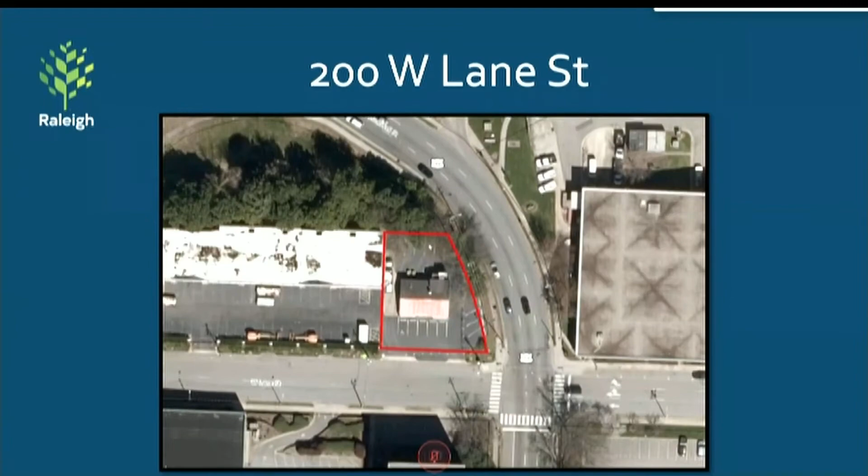As stated previously, the property is zoned DX12 UG. This slide shows the existing conditions and structure. This slide details the proposal.

The majority of the relief sought is related to the streetscape standards for North McDowell Street and West Lane Street. There is a desire to retain the existing conditions along North McDowell Street, with minor reductions to the planting area widths, sidewalk widths, and the number of street trees required. On West Lane Street, there are reductions being requested to the sidewalk and planting area widths, and also the number of street trees that would otherwise be required.

There is also relief being sought in the form of a variance and design alternate for the existing driveway. The driveway does not comply with city standards for spacing between the driveway and the adjacent intersection at North McDowell and West Lane Street, and also does not comply with the minimum driveway spacing requirements between it and the property to the west.

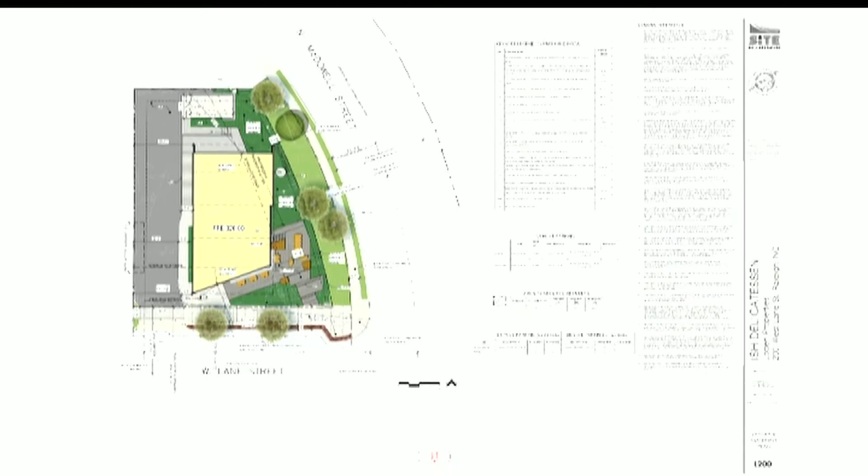The last portion of the variance being sought is a building height standard contained in section 3.3.2. This code section requires properties with a 12-story height designation to be a minimum of 2 stories. The applicant is requesting to construct just a 1-story structure. Here is an elevation provided in the application materials to show what that will look like.

Staff, both zoning staff, planning staff, and transportation staff, do not have any immediate comments on the design alternate or design adjustment request. As it relates to the variance request, staff has only one comment on the height standard to provide a minimum of 2 stories, because this property is zoned for 12 stories and has an urban frontage.

Staff's comment is that there was no obvious reason provided in the application about a peculiar condition of the property that would prevent a 2-story structure. As we understand it, it is more in keeping with the desired use that they adhered to a 1-story structure instead of the required 2. So that is staff's only comment.

I know transportation staff are available if there are any specific questions related to the transportation details. And I'm happy to answer any other questions if there are any from the board.

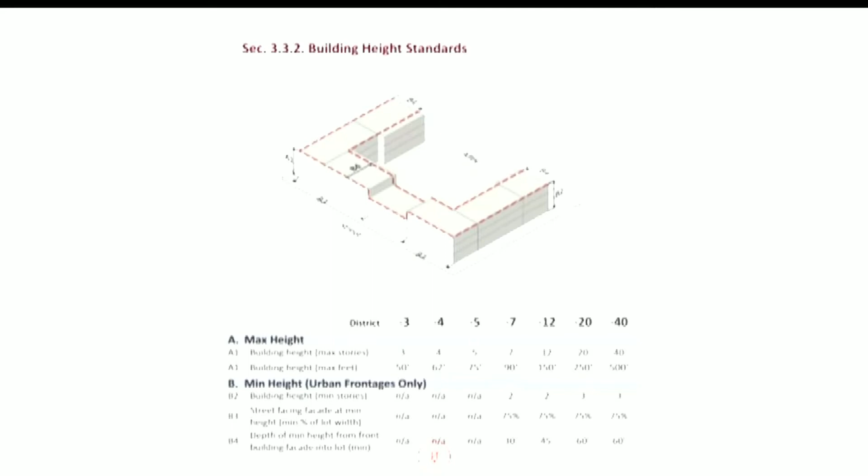And Michael, do you have Brandy on the phone? I think I saw that she came in. Hey, hi there. I'm not sure, I'll defer to John to see if she's now joined. She is actually, do you want me to unmute her to start the process to bring her in? That'd be great, okay.

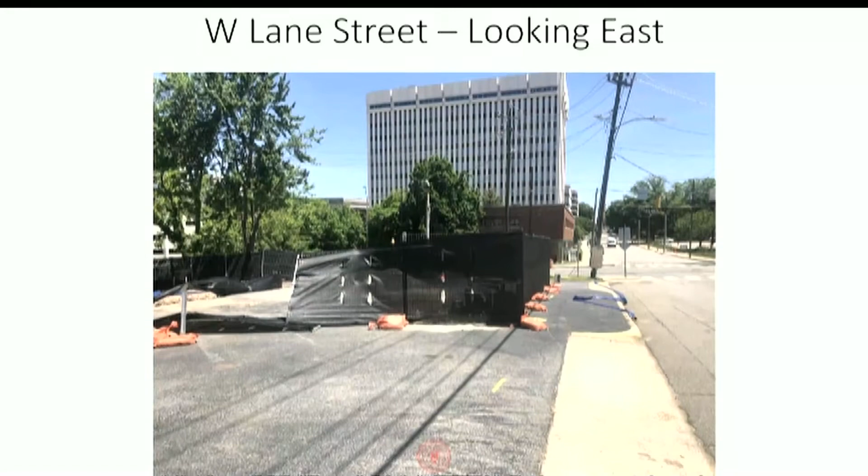Next picture. So this is a picture looking into the site from West Lane Street. You can see the hotel there on the left-hand side of the picture, and the site itself there on the right-hand side. I'll note that that hotel building wall right there is about 22 feet tall, just to give you a sense as I talk about it in relationship to the proposed building and the spirit, purpose, and intent with what we're doing from a height standpoint.

All right, next slide, please. So this is the site plan. You'll notice because we're in the DX district, all of our outdoor amenity area has to be at the ground level outside. That's what you see between the building and the corner of the property, activating that corner, creating a really unique space as folks are driving by out of downtown.

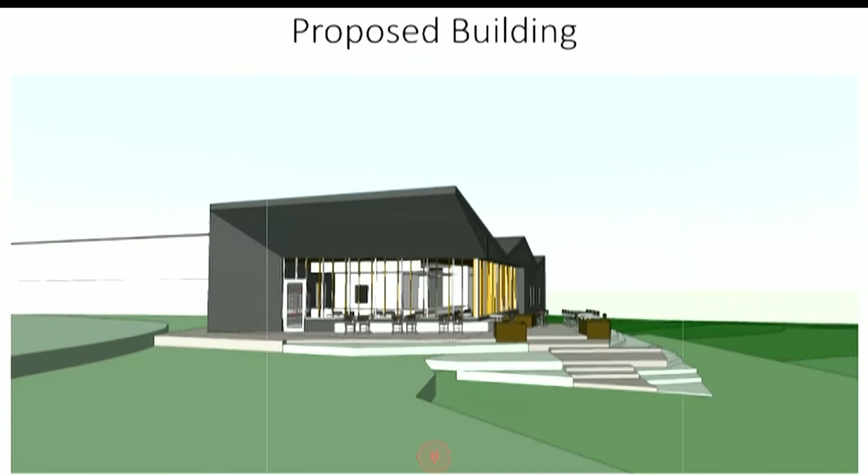Next slide. So this is the proposed building near the intersection of West Lane and McDowell looking north. Again, you can see what a unique building Clearscapes has designed with all that transparency at the corner and that kind of activity spilling out towards the corner, creating a really unique visual there. You'll notice that architectural feature that ramps up from the front of the building. If you can go to the next slide there.

So while we're on this slide, I noted this in relationship to our variance request related to 1-story versus the requirement for a 2-story building. As I mentioned, the existing hotel right next door, the wall closest to the site, is 22 feet in height. The building here is approximately 20 feet, and relative to average grade is taller than that - I believe just 23.5 feet from existing grade.

So actually, given the finished floor elevation of the proposed deli building, that architectural feature will be just about a foot taller than the roof of the hotel. So in terms of the spirit, purpose, and intent of creating that consistent urban street wall from a height standpoint, we think we're achieving that through that portion of the building, the architectural feature that will actually be taller than the hotel closest to the deli building.

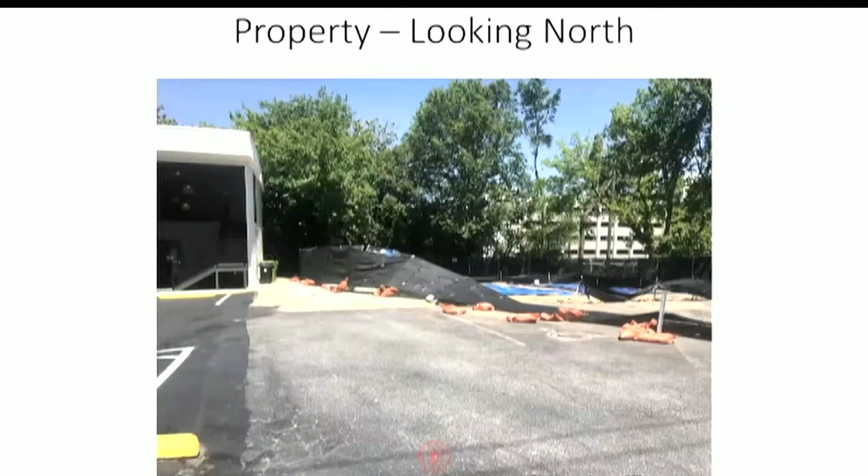Okay, no worries. While that's going on, I'll just say we are retaining - there are 2 driveways on the site today. We are closing the one that is closest to the intersection, and I believe narrowing up a little bit the driveway to the west, but maintaining that existing westernmost driveway. That will be the property's access point.

It's located as far away from the intersection as possible. So complying with that distance would be a hardship in that it would lose any access point directly to West Lane Street. We don't have any access to McDowell Street. And again, that doesn't result from action of the owner - those are existing conditions.

And from a spirit, purpose, and intent standpoint, we're setting that as far away as possible from the intersection. Going next to the 8.4 and 8.5 design adjustments.

Keegan did a good job of summarizing the requests related to McDowell Street. Again, the requests in front of you now are the result of working with transportation over the last few months, coming up with something they could support as well.

So for McDowell, we are really looking to maintain the existing streetscape. We are adding some new street trees along that area, but because of power lines and such, they have to be clustered, not a uniform 40-foot on center.

And for West Lane Street, again, we are providing something close and comparable to what the downtown master plan and the required streetscape would be, with just a 2-foot reduction in the sidewalk width, a 2-foot reduction in the planting area, and because of some underground utilities having to cluster those trees together.

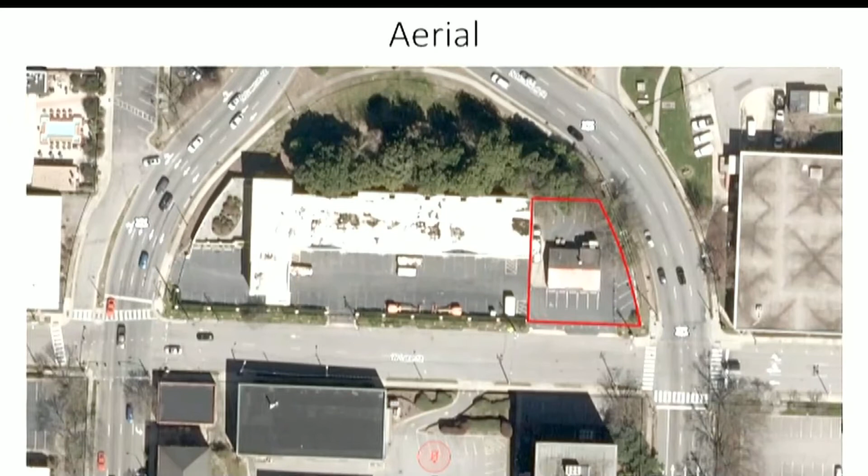So Catherine, I don't have everybody unmuted, so if you want me to unmute people specifically. I would unmute all the participants. And I think, again, Michael has confirmed that the participants were all with him for this case. So I think I would also ask if staff has any additional questions as well, or anything else they would like to add. So that would be Keegan.

Staff — Kathy has asked her question. So Kathy's question is for Keegan: what's the rationale for the 2-story requirement?

Yeah, absolutely. There's not really much provided verbatim in the code. Typically, each code section does contain a purpose and intent statement. Our understanding of the minimum 2-story requirement is related to creating a street wall, like Michael touched upon. Essentially, a large swath of downtown is zoned for fairly tall buildings, and there is a desire for all of those parcels to be developed fully to the maximum height allowance. I think the intention in these districts with rather tall height allowances is a minimum is put in place to create some uniformity so you don't have buildings towering over smaller structures, and to promote a greater degree of density and height in these downtown areas or other places with a large height allowance.

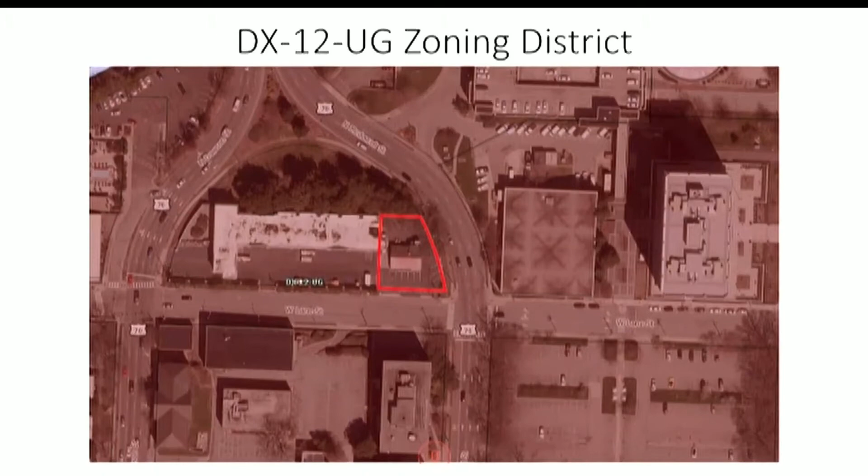Okay, so Mr. Birch, I assume there'll be no rebuttal since there was nothing raised in the way of an issue. Staff, anything further you want to add to this?

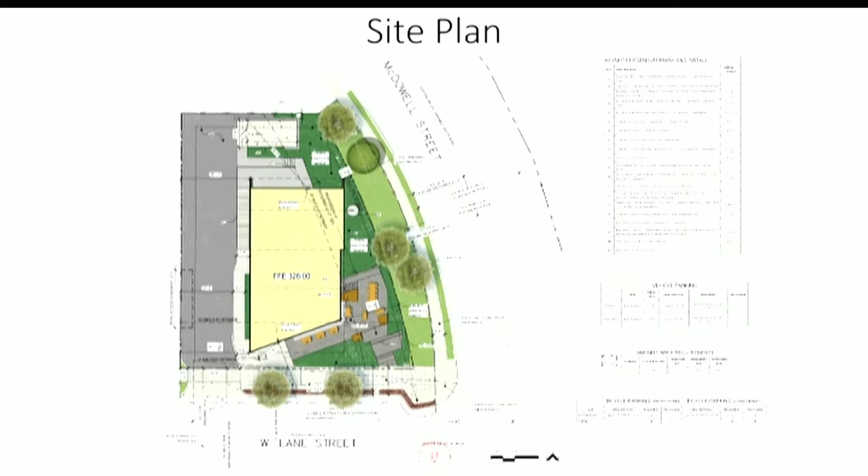Yeah, thank you. I was going to raise the question about the alternate when we got to the vote, because I understand everyone can deliberate, but thank you for reminding me nonetheless. So for this first item, Mr. Kenny, would you be the voting member on this first item, the variance, please? And again, we're open for deliberation, but I will also accept a motion.

John Koontz, motion to approve. I second the motion. Who was the second, please? Steve Kenny. Okay, thank you, Mr. Kenny. So we have a motion and a second. Any further discussion? Mr. Puccini, would you then call the roll?

All right, Mr. Kenny. Approve. Mr. Koontz. Approve. Mr. Swink, Chairman Swink. Approve. Let's see. Mr. Mile. Approve. Thank you. And Ms. Redisell. Approve. Thank you.

Thank you, folks. Let's move to the second item, which is the design adjustment for 200 West Lane Street. Again, we'll have any board deliberation, or I'll entertain a motion. I make a motion to approve. Thank you, Mr. Mile.

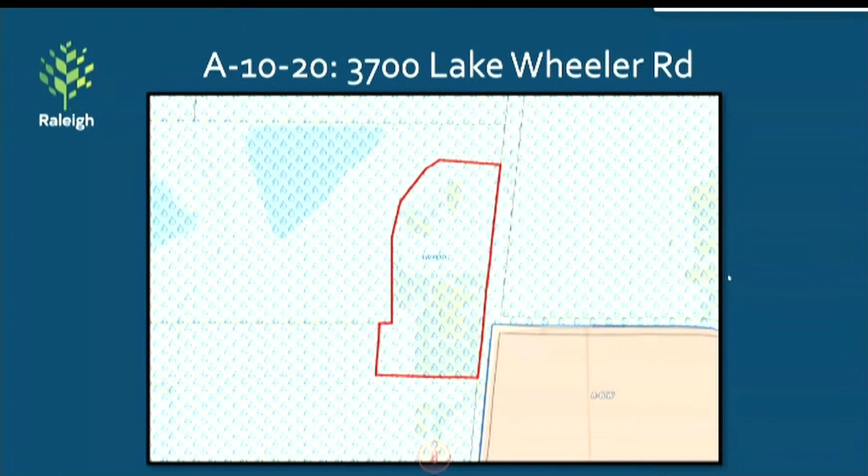As you can see, the subject property is a rural parcel. Currently situated on the property are a church, some accessory structures, and a residence, and they are all on one lot of record.

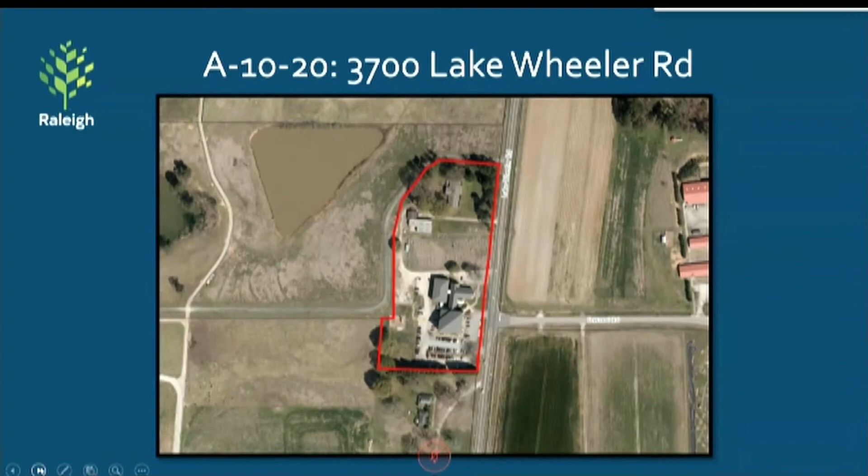That is basically the summary of their requests. I'll note that transportation staff has reviewed the request to make sure it is complete and accurate, and that they are requesting the exact relief needed. It's my understanding they don't have any comment on the application, and neither do zoning staff, but they are here to answer any questions you may have. That concludes my presentation.

Thank you, Mr. McDonald. Any questions for Mr. McDonald? No? Let's move on to the applicant, please.

I would start, Mr. Chair, by recognizing Nicholas Carr as the point person, the attorney for the case. Please state the name of any witnesses before you and introduce them before they speak.

Thank you. My name is Nicholas Carr. I am the attorney for the Point Church of the Triangle. I am also an elder at the Point Church of the Triangle. They've asked me to represent them in this case.

This property has been before the board before. In the past, we asked for a variance that was granted a couple years ago as well. Just a brief history of this parcel: the church and the cemetery especially date back to the Civil War times. There are several Civil War descendants and soldiers actually buried in that cemetery.

When the Point Church of the Triangle began operating the site, we noticed some deterioration of the cemetery, specifically that fixture. You may notice it's right in the middle of the plot, just south of our proposed subdivide line. It's that rectangular shape that's there. We erected a fence to protect some of the gravestones, because there were people actually parking almost right up onto the gravestones themselves.

Thank you. Okay, so we have a motion from Mr. Koontz. Do we have a second? Second, I'll second. Who was the first? When you second, please state it. I heard Mr. Mile first. Thank you, Mr. Mile, for your second. Any further discussion?

If not, we will take a roll call. Mr. Koontz? Okay, we gotta hear you, you're on mute, he's muted. My mouse went on hiatus. Approve. Thank you. Mr. Mile? Yes. Thank you. Chairman Swink? Approve. Thank you. Ms. Rittisell? Approve. Thank you, Mr. Rainey? Approve. Thank you. Okay, thank you very much.

Thank you, Mr. Carr, for being with us today. On to case hearing number 3.

Thank you. The third case is 3402 Leonard Street. The property owners are Alexander and Morgan Butts. The variance request or case is BOA-0009-2020. And we have two people signed up to participate in this case, Cecile Richardson and Alex Butts.

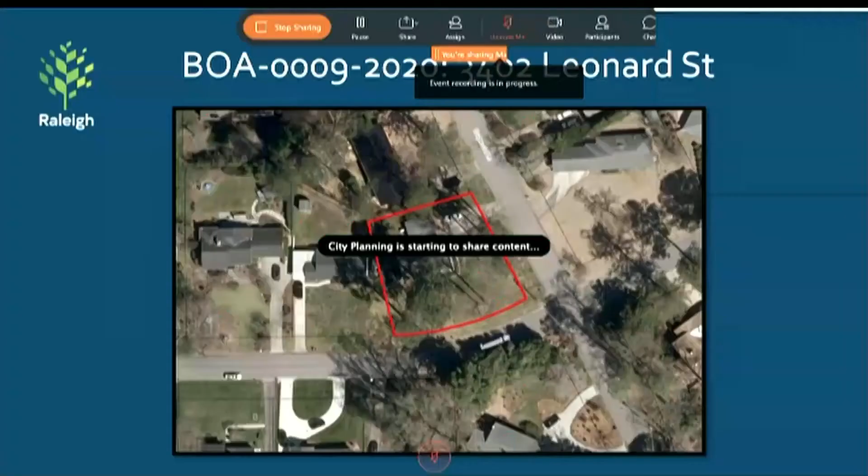Now I'll begin the presentation. Here is the subject property. It's located on the corner of Dogwood Lane and Leonard Street. The property is zoned R4.

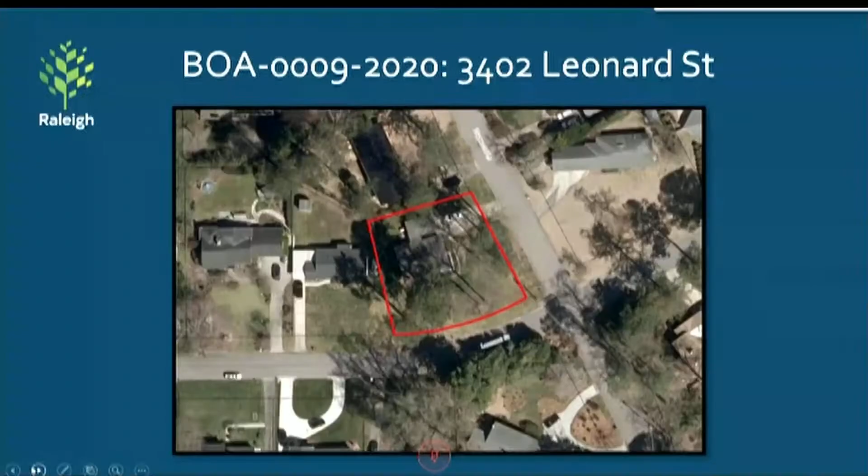As you can see in the next slide a little more clearly, there is a sliver that exists outside of the existing setback. So to fill in the structure between the primary residence and this existing enclosed garage will require filling in a fairly narrow strip, estimated to be about 6 inches, but advertised in the request as 1 foot, just to provide some wiggle room to the applicant. Filling in this portion of the residence does require a variance because this small sliver is situated outside the required setback. Thus the addition will be about 6 inches to 1 foot further into the setback than required.

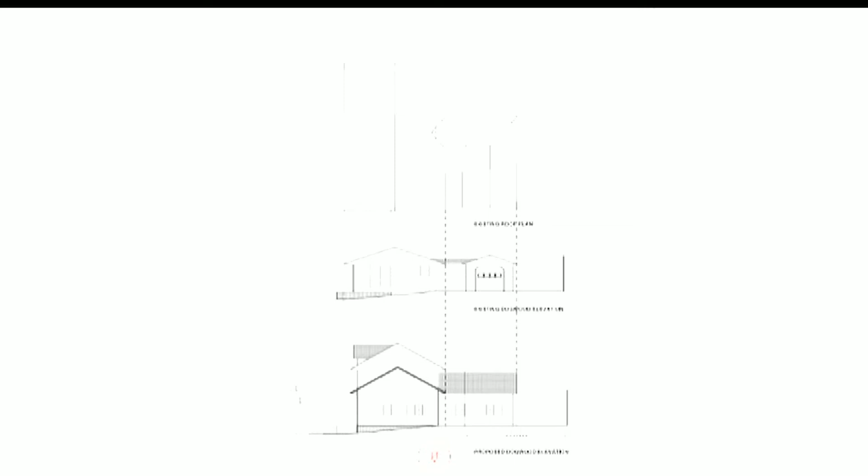That's probably better shown by this image. The central or middle image shows the existing Leonard elevation. The bottom image shows the proposed elevation. Again, there'll be a substantial addition, both vertically and laterally.

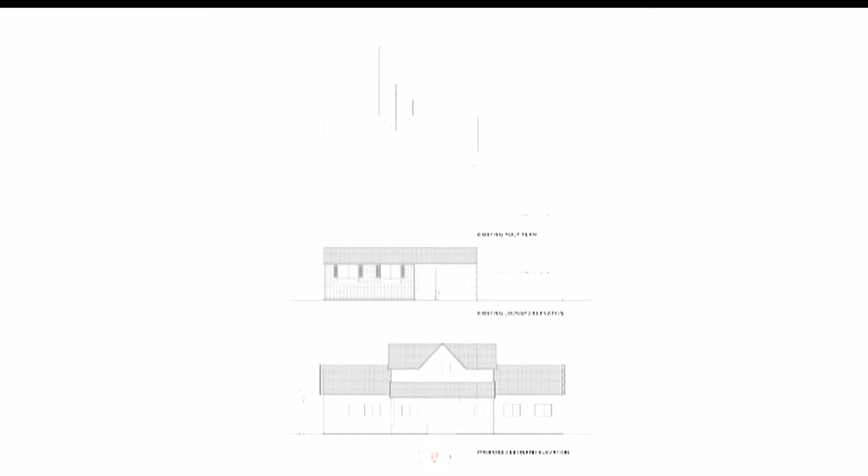I wanted to provide some commentary that staff had related to the variance standards. For the first standard, that unnecessary hardship would result from strict application of the ordinance, we wanted to note that the applicant is also proposing to add a second level and an addition towards Dogwood Lane. This image shows how that addition will branch out towards Dogwood Lane, in keeping with or within the allowed setback. There is substantial buildable area on the site within the allowed setback. We understand there is an existing structure there, and it may be more conducive to their plans to fill in the site, but staff wanted to make the comment that there already is a proposal to add in that direction, and there's other buildable area on the site that wouldn't necessitate granting a variance, despite how small that margin is.

Standard number 2: the hardship results from conditions that are peculiar to the property, such as location, size, or topography. Staff has no comment.

On hardship standard number 3, that the hardship does not result from actions taken by the applicant or the property owner: staff's comment is that the existing breezeway and garage are legal non-conforming structures that can remain in place. Again, additions elsewhere on the property would not necessitate altering these in any way.

The 4th standard is that the requested variance is consistent with the spirit, purpose, and intent of the ordinance. Setback regulations are intended to provide adequate and uniform spacing between structures, both on the property and between adjacent properties. While the expansion will not substantially increase the amount of conditioned space within the required setback, it will result in the garage being converted to a more livable space, and thus could be viewed as an intensification of the use. So that concludes our commentary.

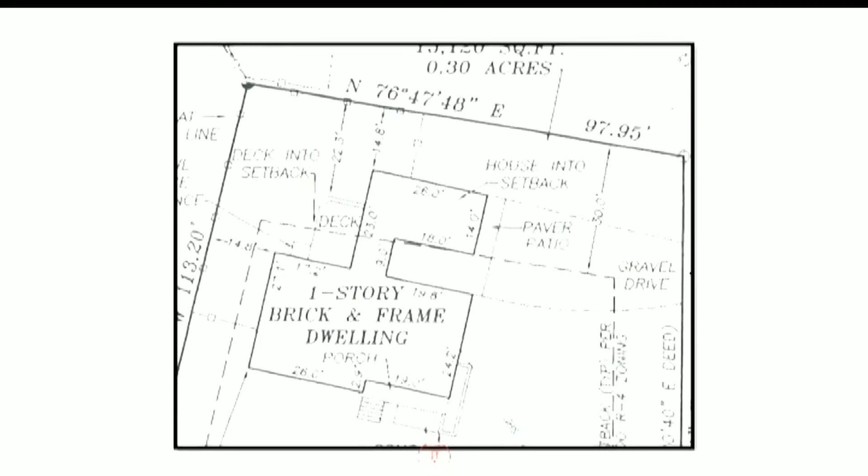Other questions? No? Okay, let us hear from Ms. Richardson, the applicant's representative. Yes, again, this disembodied voice is Celie Richardson.

The request, as Keegan said, is for about a 6-inch wide strip that tapers, and the 1 foot would be useful, with the purpose to fill in the interior breezeway.

The project can be done in addition to the house while leaving the breezeway, but it's an awkward space. It's not wide enough to even put a couple of lawn chairs or a grill very easily, and so the Butts wish to fill that in as part of their project.

Next slide, please. Next slide, Keegan. Yeah, some of this has already been gone over, but this house was acquired by Mr. and Mrs. Butts in May of last year.

Next slide, please. As Keegan said, any expansion would be in full compliance with the UDO, except for this slight encroachment. I do note that the Butts are looking toward a one-story addition, rather than a two-story addition at this point. They bought the house with the idea that they would add on to it. Mrs. Butts is pregnant, expecting a baby this fall. They bought this house in this neighborhood because this is home to them. They have family nearby. They wanted to raise their children in this kind of neighborhood near their family, and they thought that this would be in compliance.

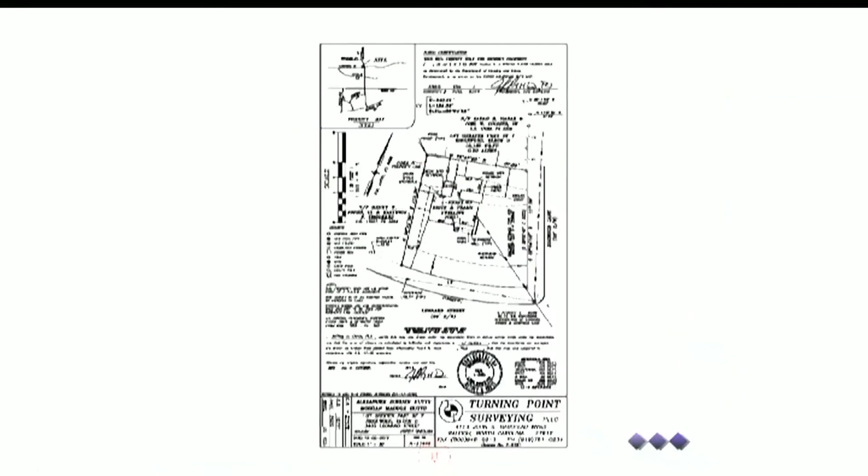Thank you again, this is Celie Richardson. Next slide, please, Keegan. This is, just for the board's information, the previous approval that was provided to us by Mr. Hodge and Mr. McDonald when we had our meeting, just for FYI.

Again, the 1-story and 2-story, just to summarize quickly, are both in compliance with the UDO. We were not able to proceed on this because our contractors need information on how they can build and whether the variance will be granted before giving quotes.

Can you hear me? Yes, go ahead, Alex.

When my wife and I first got started on ideas for this project, we were unsure if we would be going up with the addition and turning it into a 2nd story, or going out to the side with the addition. Once we discovered the issue with the rear setback, discussions with contractors became difficult because they needed more clarification from us and the city before providing accurate estimates. When we submitted this variance request in January or early February, we met with city planners and found it best to submit plans showing both options.

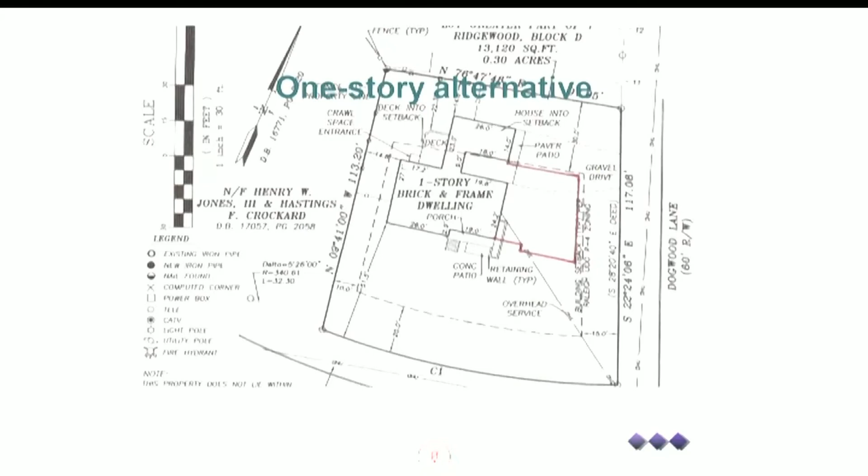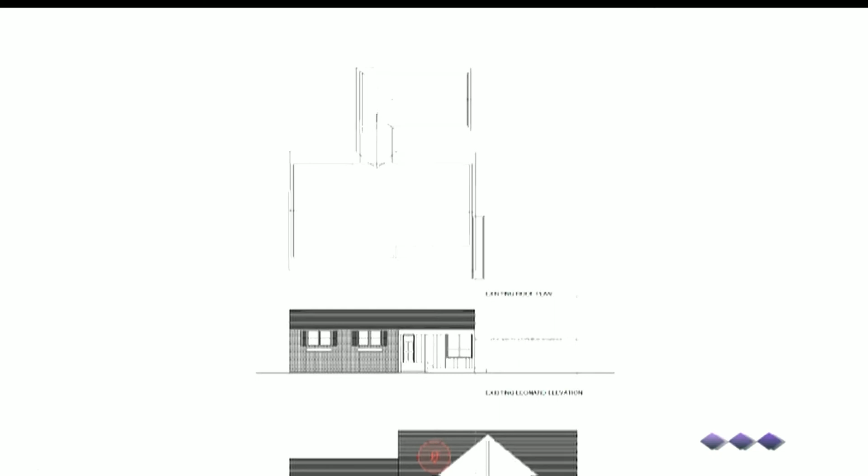This slide again shows the existing footprint of the house and what the potential view post-project would be. This view is looking from Leonard Street.

Now I would like to walk you through the two-story alternative that we had submitted originally. However, since that time, our focus and preference has shifted to the one-story addition. This is the view of the two-story alternative, as well as the addition towards Dogwood—the worst-case scenario showing both going up and out. This particular view is from the front, from Leonard Street, looking toward the property.

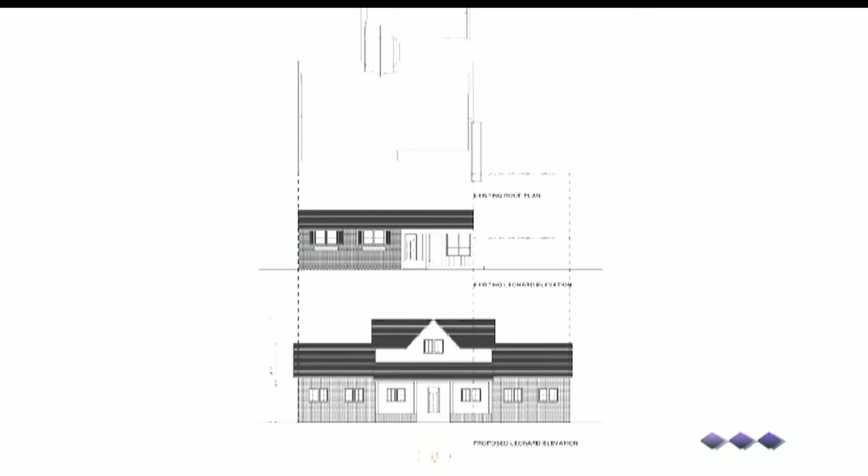At this point, I would like to turn things back over to my attorney. Thank you very much, and this is Seeley Richardson again.

We will summarize briefly to respond to the ordinance factors. We believe that denial would cause an unnecessary hardship. The breezeway is too small. If it's denied, he can still do the addition, but it will be left with an awkward and unusable space, which would be difficult to build, difficult to adapt into a building.

And the breezeway is peculiar—not only peculiar to the property, but peculiar to this house and not the property itself. So even more, it's not in compliance with the standard.

And again, this was not created by the owners, and they stopped immediately when they discovered the issue to come before this board to get approval.

And it's consistent with the UDO. Public safety is not implicated. The view from adjacent yards will not be changed. There's no change in use at all—the garage will be left as a garage, there are no plans to change anything regarding that. So there wouldn't be any change in density, it would just be a slightly larger house in the overall project. That's totally in compliance with the UDO, totally within the setbacks, except for this 6-inch sliver.

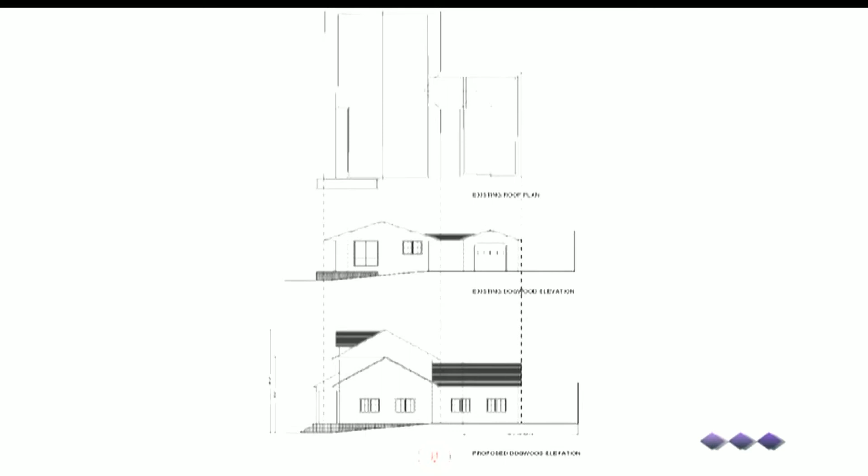So, we've asked for public comment and received none, we can close the evidentiary hearing. Mr. Kenny, you'll now be our alternate for this deliberation, please. And we will take any board discussion or a motion.

I will offer a motion that we approve this application for a variance. Is there a second? John Coons, second. Thank you, Mr. Coons. Any further discussion? Let's take a roll call vote, please.

Sorry, I had to unmute myself. Okay, Chairman Swink, approve. Mr. Coons, approve. Thank you, Mr. Mile, approve. Thank you, Ms. Rittisell, approve. Thank you, and Mr. Kenny, approve. Thank you all.

Thank you, applicant, Mr. Butts and Ms. Richardson. Let's move on to evidentiary hearing number 4. Okay, the fourth evidentiary hearing is 1924 Capital Boulevard.

Bank Central Inc. is the property owner applicant. It's variance case BOA 0006-2020. Three people signed up to participate in this evidentiary hearing: Toby Coleman, Megan Weeks, and Soretta Amos.

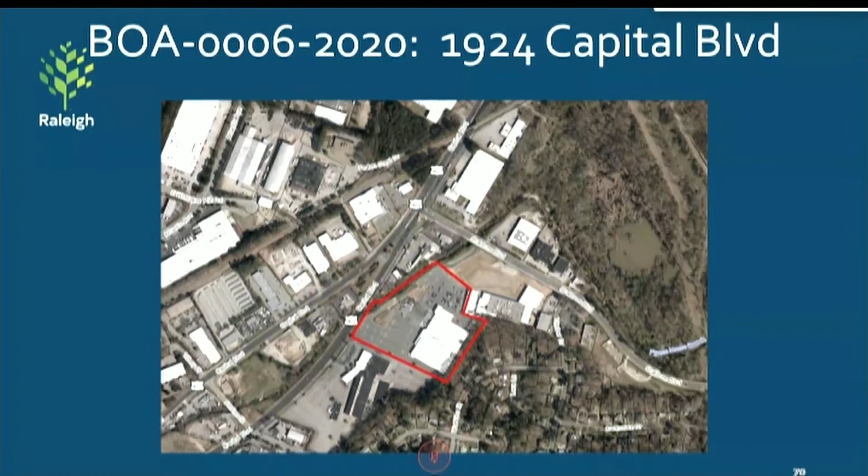Unfortunately, Section 6.1.5.g of the Unified Development Ordinance explicitly states prohibited uses include a sign not explicitly allowed in the zoning district noted in the table of signs allowed by districts from Section 7.3.2, or any signs erected in violation of Article 7.3 Signs. And so this... sorry, there's a hair trigger on this slide presentation.

This is the section we're coming up against, where I would note that the board has made some allowances in the past for this type of variance. Staff is pointing this out again. We have a new board, and we also have a new zoning administrator who I've been in contact with recently on this particular matter.

He believes that these signs, as stated here, are considered a prohibited use. So it's his opinion, I believe, he can speak for himself, he's on the call, but that a variance of this sort would be considered a use variance, which the board does not have the authority to grant.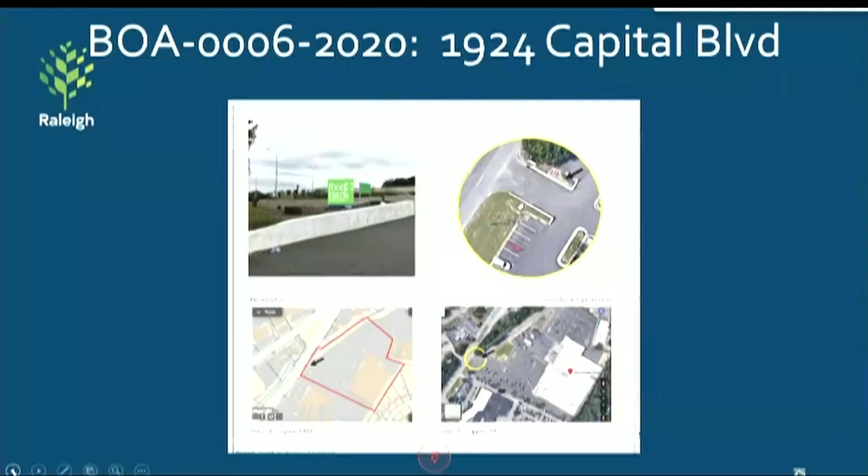Okay, I would note that we did administer the oath to Mr. Rometta, so I'm assuming he is on the call. I don't know if we want to ask him to provide any comment at this time or not. That's up to you—you could hear from the applicant first and then see if you'd like to ask Mr. Rometta a question. The order is up to you on that.

Thank you. Okay, let's hear from the applicant. We'd like to get Mr. Coleman's information before us as well—that might help in some way. Mr. Coleman.

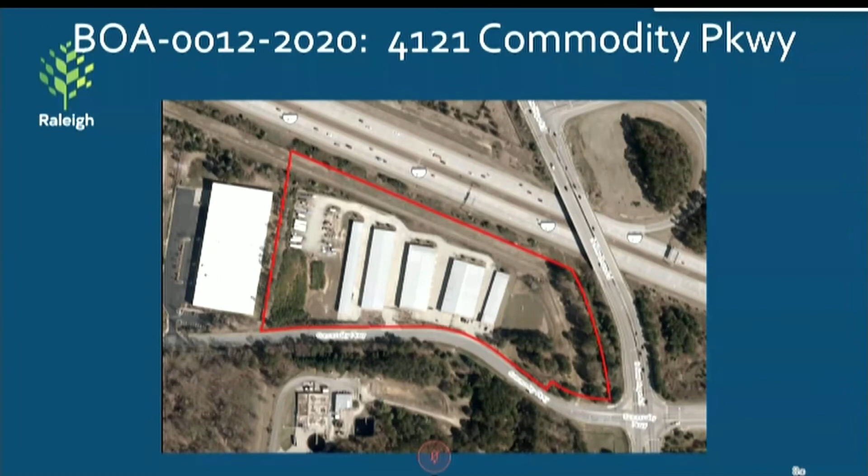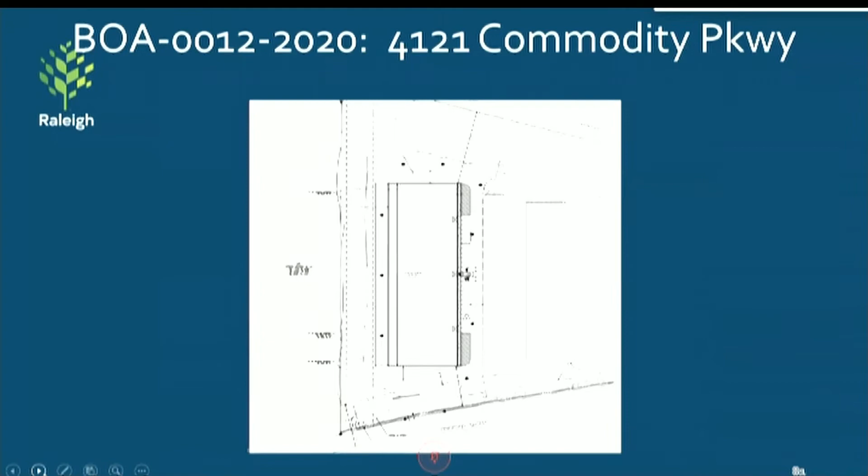This is showing again on the western end of the site where they're looking to add an additional building. This is where all heavy industrial uses have this requirement for a type C1 or C2 protective yard that's to be established along all property lines abutting a public right-of-way.

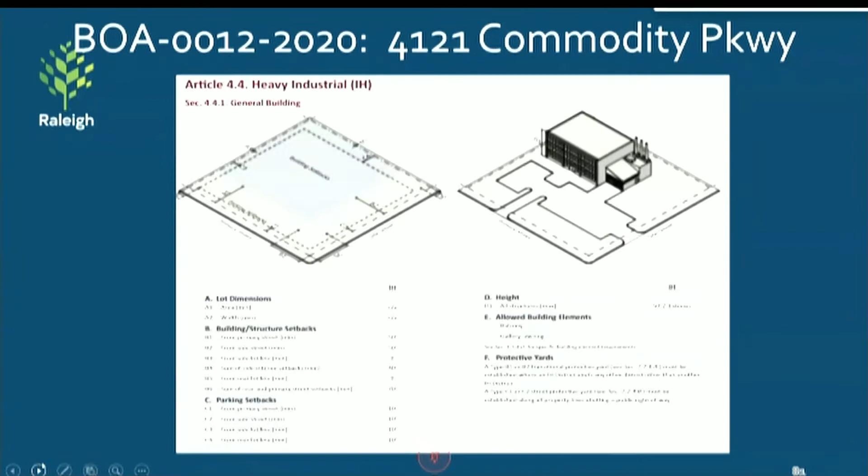And here are the types of protective yards called for in section 7.2.4b. So they would have to do the stuff in the second or third column from the left. So a 10-foot minimum width area with a 6.5-foot tall wall or fence, and then 30 shrubs scattered over the course of every 100 linear feet along those 3 streets.

Or the type C2, which is a wider area. It does not have the solid wall or fence requirement, but it does have 15 shrubs for every 100 linear feet, as well as a requirement that the shrubs be at least 5 feet in height. And they also have a requirement for 4 shade trees, basically one shade tree every 25 linear feet around the edge of the property along those 3 public streets. So those are the provisions they're seeking relief from.

So again, I think the applicant would need to provide additional information as to why a variance would be needed with those provisions around the 3 streets adjacent to the site, even though they're only doing work in one portion of the site.

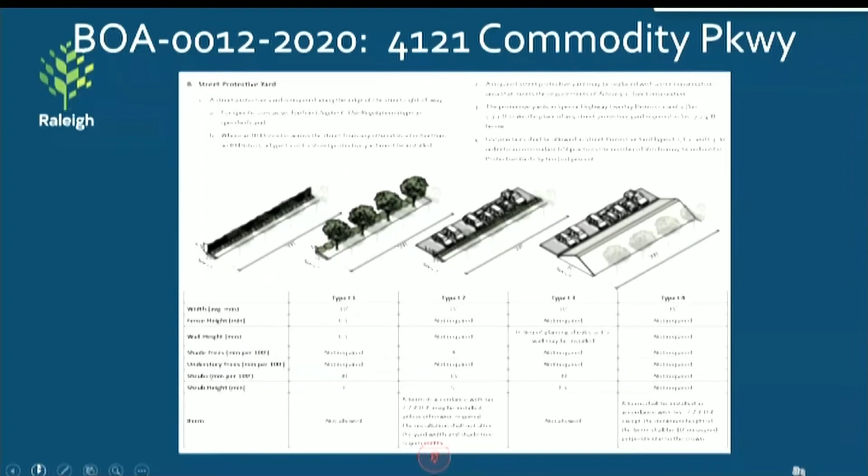Unless you have any questions of me at this time, that would conclude my presentation. Thank you, Mr. Hodge. Do you have any questions from the board? Okay, hearing none. Let's move to the applicant, Mr. Coleman.

Good afternoon. Toby Coleman, 150 Fayetteville Street, for the applicant, which is a subsidiary of Public Storage, the self-storage company. This is, as Eric outlined, a variance related to a proposed expansion of the Public Storage Commodity Parkway facility. It's located in an industrial park just off South New Hope Road in East Raleigh.

As you can see on that map, it's adjacent to what I still think of as 64 bypass, but I guess now on maps at least is known as I-87. And it is not far from the intersection of 64 bypass and the Beltline.

As noted, what Public Storage is seeking is a variance related to a street protective yard requirement. The only street protective yard variance they're seeking is from the street protective yard requirement along Commodity Parkway.

We did provide a full copy of the site plan. It's on a slide, which I'll get to in a second, and it's also been provided separately as part of the packet. It shows that they are able to provide a full street yard as required by the UDO along South New Hope Road, because the property abuts a highway to the north.

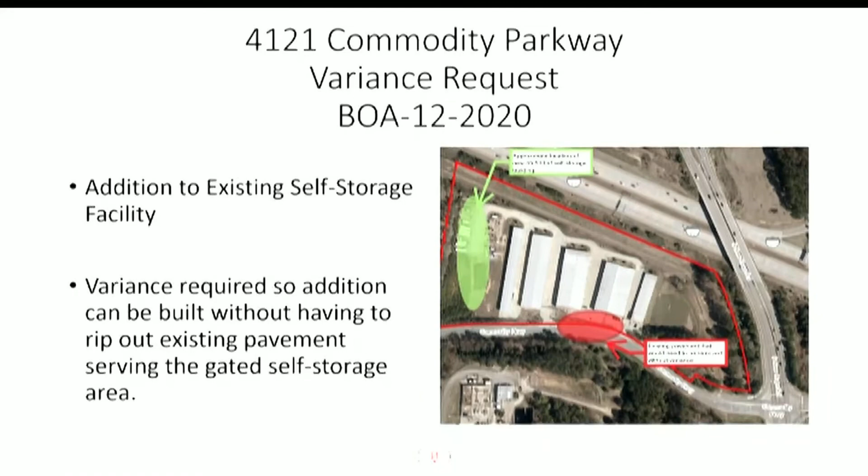If you go to the next slide. This is a copy of the full site plan. Again, there's a PDF copy in the packet that's provided, I believe on board docs, as a third and separate document.

As you can see, the planned new building is in yellow. The area, you can see sort of the striped area where there's going to be a protective yard and tree protective area on the eastern side of the property.

What you can see here, you have to examine pretty closely, but basically there's a few things, in addition to the fact that they have to dedicate some additional right-of-way, I think 4 or 5 feet. So that's pushing the 15-foot line back, not just from where the existing right-of-way is, but further into the property in a way that, again, was not anticipated at the time this was originally developed. If you can go to the next slide.

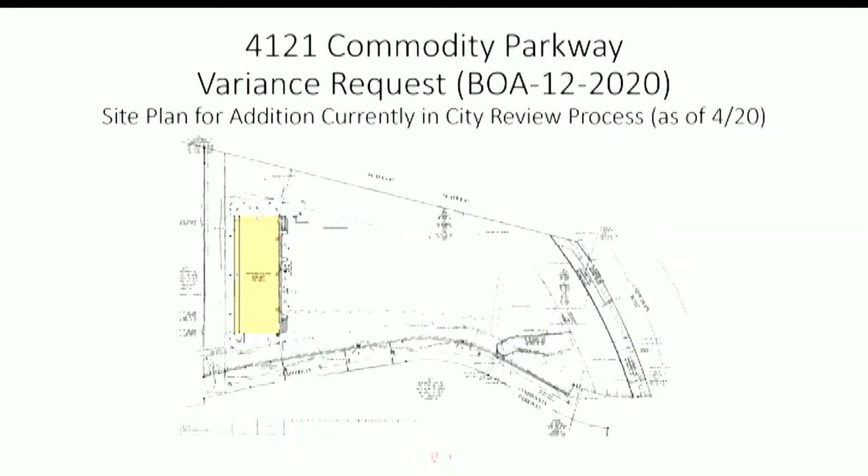This summarizes the issues. They're only adding one building to the western edge of the lot. The variance being requested actually has nothing to do with that—they're satisfying the setbacks and otherwise for that part of the property. The issue really has to do with the existing development areas, and the main problem is there's a 15-foot street yard requirement along Commodity Parkway.

This was not a requirement when this property was developed 15-plus years ago. I'll note it's in an industrial park, and the property across the street is also zoned industrial. So the concern about screening—this is not a through street, it's an industrial street within a development, so there aren't a lot of sight issues here. It's not going to be unsightly. Again, it's just allowing them to keep the existing conditions on the ground.

If you go to the next slide—here, to the extent it's helpful, this is as granular as we can get. I clouded in red the existing paved areas that are within 15 feet of what will be the new right-of-way line after the dedication associated with the site plan is approved. As you can see, the easternmost area is the largest area. That's the area close to the secured entrance gate—I think it straddles it.

All right, Mr. Chair, that's all I have signed up to participate. I think you can start with the staff presentation with Eric Hodge when you're ready. Mr. Hodge. Thank you.

So Matthew and Molly Lee, the property owners, are requesting an 8.5 foot variance from the side lot line setback requirements on the northern side of the property, set forth in section 2.2.1.b.3 of the Unified Development Ordinance, in order to construct an attached garage on the north side of the existing house, which would result in a 1.5 foot side yard setback for the detached house on a 0.34 acre property.

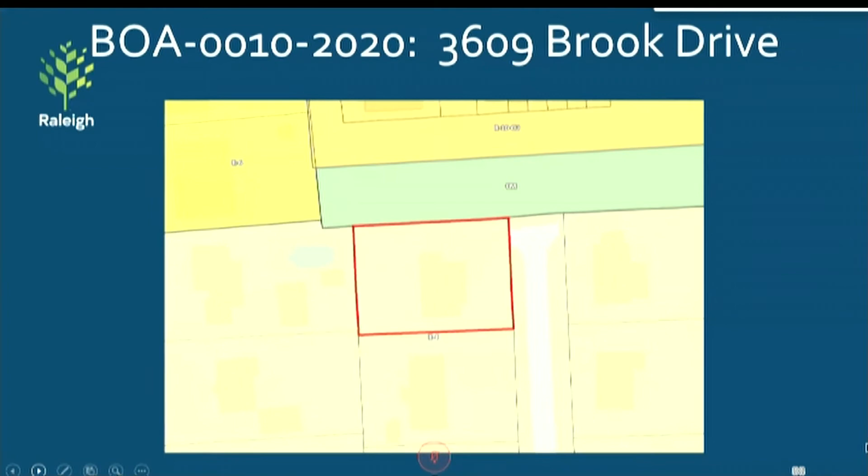That is zoned residential 4 and located at 3609 Brook Drive. Here's an aerial showing where the house is. So they're looking basically to construct a garage where the existing parking area is on the north side of the house. The ordinance requires a 10-foot side yard setback for any part of the principal structure when the property is zoned R4. The code does allow for driveways in these infill type settings to be as close as, I believe, 2.5 feet from a property line. So driveways can go closer to property lines than a principal structure can.

I would note that this house was built in the late 1950s and has been there for all those years since without an attached garage. Garages, while common to residential structures, are not a requisite element. A detached garage would be subject to different standards. Detached structures can violate setbacks for the principal structure; however, they have their own different set of rules that they follow. There are limitations on the size of detached accessory structures and how close they can go to property lines. However, in no instance could a detached garage go closer than 5 feet to a side property line.

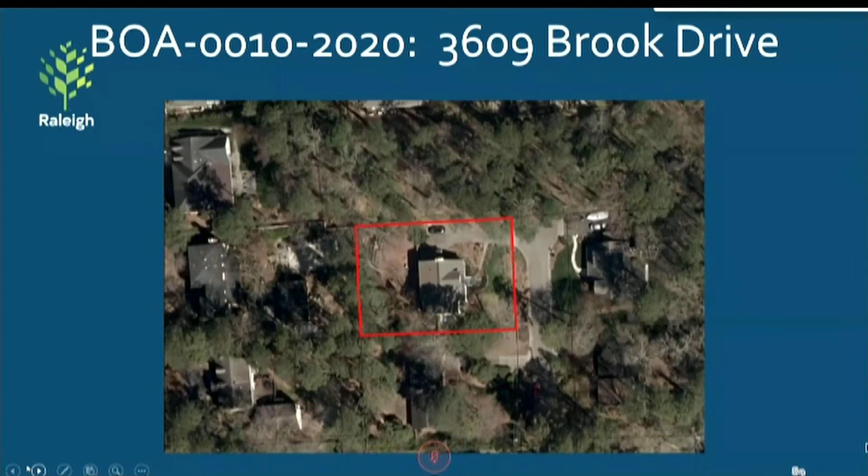Here is the plan showing the proposed garage on the north side of the house. In this drawing, north is actually to the right, so they're proposing a fairly substantial garage on the right side of the house when viewed from the street.

The code requires a 10-foot setback from the property line. This drawing shows 1.8 feet, but I think the request was written a little more generously to allow for wiggle room in case something in the field was off. So the request is for a full 8.5-foot variance, which would result in a 1.5-foot setback if approved.

That concludes my presentation, unless you have any questions for staff at this time. Thank you, Mr. Hodge. Any board questions for Mr. Hodge?

Yeah, I have a question. Is this currently being operated as a residence and it's going to become a daycare? I believe this is residential. The next case, the last case on today's agenda, is about a daycare. So this is just about a variance for a garage addition.

Okay, I'm sorry, skipping ahead. No worries, that's okay. Out of curiosity, you've done your reading, out of curiosity, Mr. Hodge.

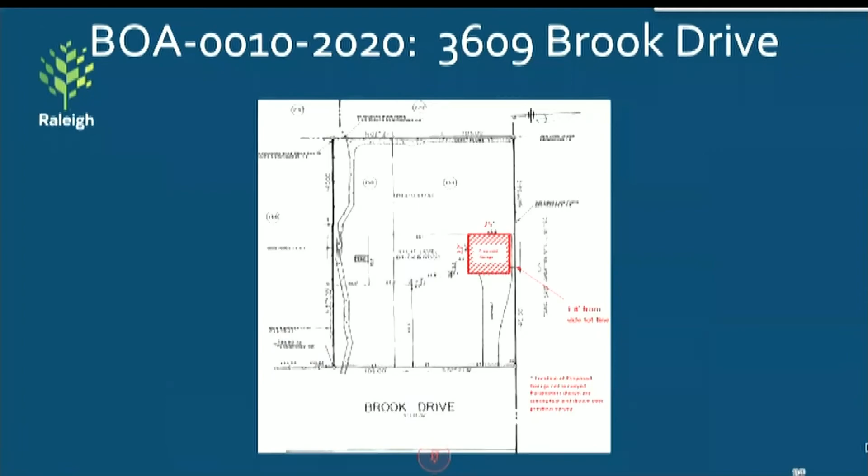Good afternoon, this is Isabel Maddox, PO Box 946, Raleigh 27602.

I'm here today on behalf of Matthew and Molly Lee. They're seeking a variance for their residence at 3609 Brook Drive. Mr. and Mrs. Lee are here and available for questions at the end of my presentation. We would like to request that the board accept the application materials as part of the record. And we can proceed with my slides to the first slide.

You can see the property in red is the subject property, and it backs up to a townhouse development. I'll go into detail, but you can see the space that exists between the northern edge of their property and the closest other developed parcel. They are seeking an 8.5-foot variance to the side lot line to permit an attached garage, to meet the setback requirement. There's currently a carport in that location.

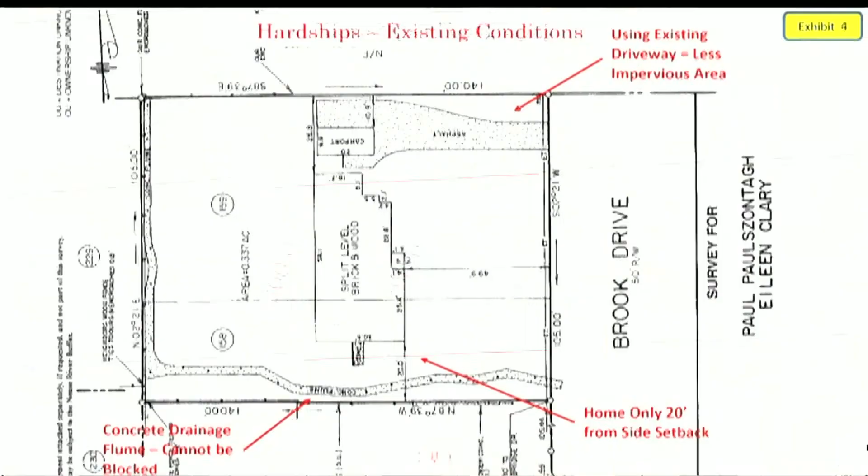Now jump back to slide 2, the aerial photo. You can see just to the north of this property, heavily wooded areas, and that's what exists between this property and the townhouses to the north.

There are, as we said, serious mitigating factors for locating the garage in the requested location. The property to the north is a townhouse development, construction approximately 2014, and there's a recorded tree conservation area for 80 feet along that line.

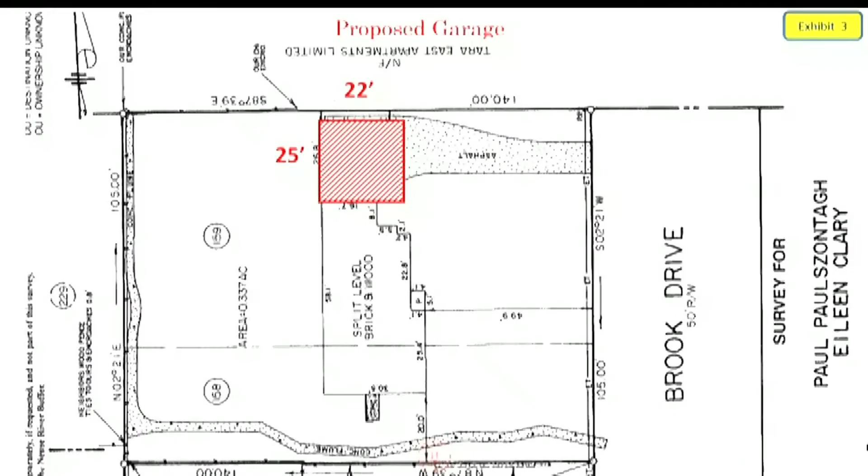There's also that area, approximately 80 feet, that is zoned conservation management. So it's not just a development pattern, it's also zoning in that area that I think it's very unlikely to be changed because there's a zoning designation of conservation management on that first 80 feet adjacent to this north line.

Also, these townhomes were built 5 or 6 years ago. They're relatively new construction - unlikely that it will be redeveloped at any point soon.

So I think there are multiple hardships on the property: the built location of the home, the concrete drainage flume, significant topo in the rear, the need for significant grading including a retaining wall in the back if you were to put it back there, and the requirement for more grading and more paving.

And the garage will essentially be located where the carport is. We think it'll be more aesthetically appealing for the neighborhood. It'll also allow certain uses of the property - garbage cans, lawnmowers, gardening tools, kids' bikes - to be put inside as opposed to being visible to the neighbors.

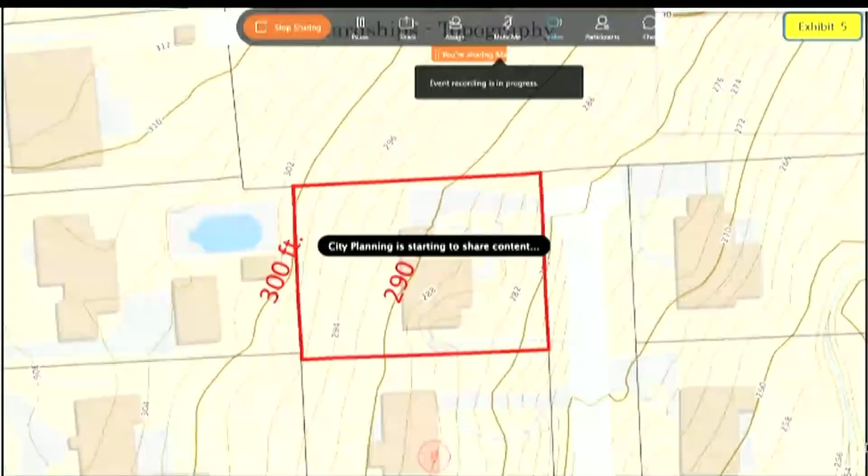Mr. Alexeyev, do you swear or affirm that the testimony you will provide in this evidentiary hearing will be the truth, the whole truth, and nothing but the truth? Yes, sir. Thank you. You're welcome. All right, Mr. Chair, that's all the participants we have signed up, so you're ready to begin with Mr. Hodges' presentation whenever you're ready.

Mr. Hodge. BOA 0014-2020, Praise Worship Tabernacle, the property owner, and Happy Times Daycare, the leasee, are requesting a special use permit pursuant to section 6.4.1.c and 10.2.9 of the Unified Development Ordinance in order to operate a daycare center on this site with a maximum enrollment of 50 children and 8 staff persons.

The property is 2.79 acres and is zoned residential 6, located at 1516 Bethel Road. This property did receive a special use permit many years ago. However, either the use never moved forward, or there was a lapse in operation, or a change in operator.

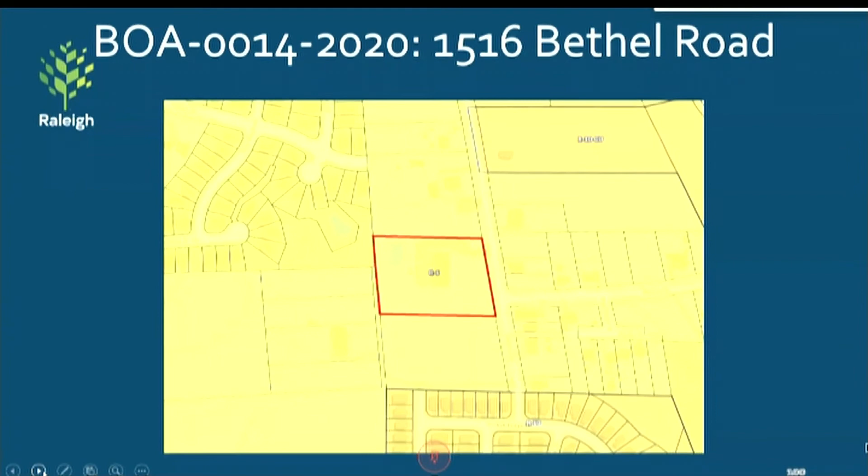The applicant has an extensive presentation to go over their responses and considerations associated with those findings.

This site, as the name of the property owner might indicate, is a religious facility, a church on the property. And so this would be a use, as I understand it, that would be operating during the week when church services are not occurring, rather than the building sit empty, so that the Sunday school classrooms and whatnot could be used for a daycare, or the daycare facilities within the church itself that are used during religious services could double down and be used by a leasee during those times when they're not in use by the church. So unless you have any questions of me at this time, I would turn it over to the applicant to go into the specifics of their special use permit.

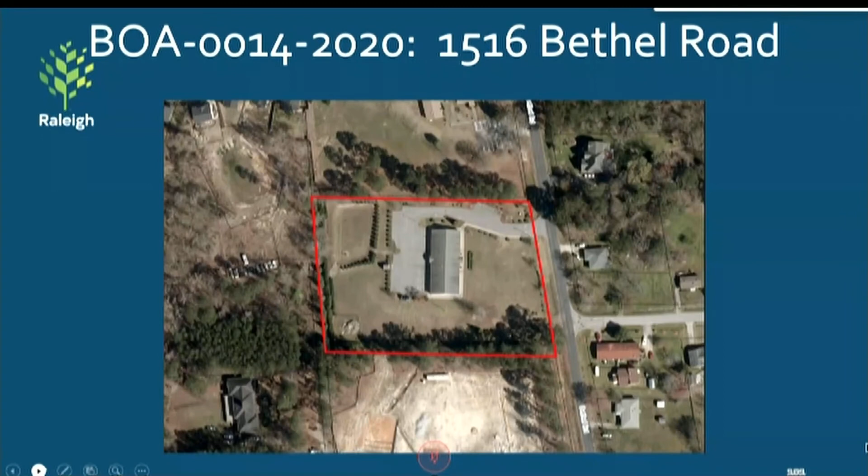Mr. Chair, you're on mute. Thank you, I thought you could read my lips.

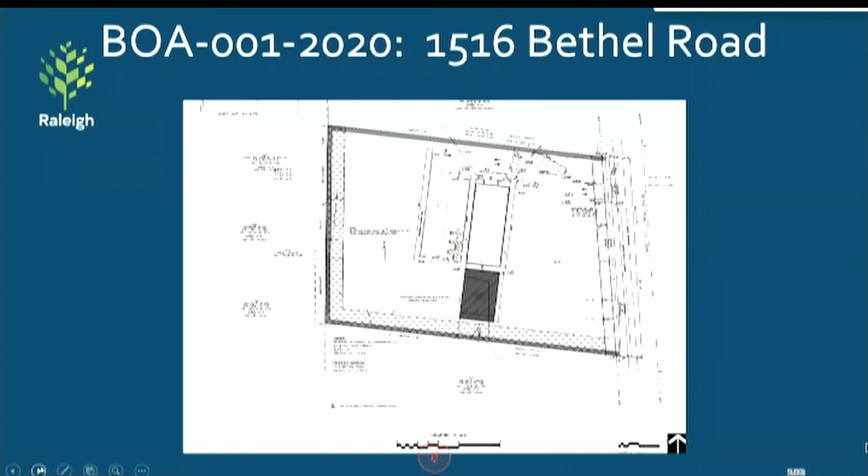Next slide, please. So just to reiterate quickly some of what Mr. Hodges mentioned, to go through Article 6.4.1.c, the daycare is for more than 8 persons where staffing complies with state and local regulations. This would include a nursery school and a preschool.

Next slide. In a residential district, the following minimum lot areas per enrollee apply. Now, this particular lot is an R6, so that would be 640 square feet. And it would also require 1 unlit announcement sign allowed, not to exceed 2 square feet in area and 3.5 feet in height. Next slide.

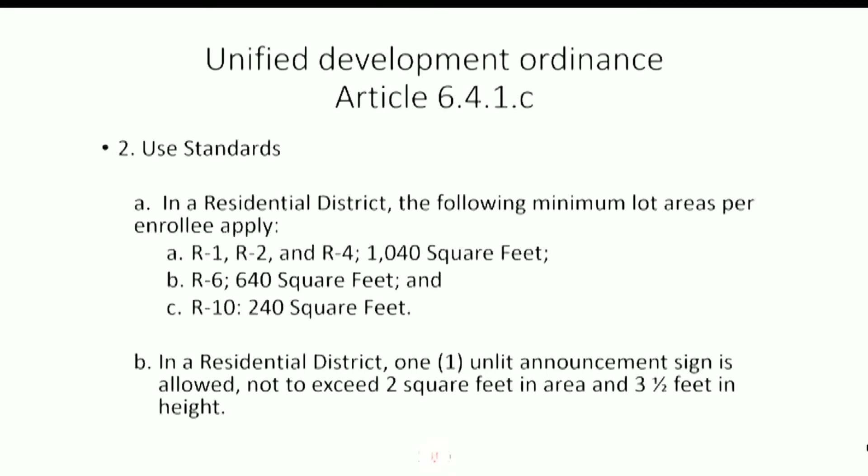In a residential district, a type A1 or A2 transitional protective yard must be established along any side of the property abutting a residential use. Likewise, a type C2 street protective yard must be established along all property lines abutting a public right-of-way, and the daycare must comply with all state and local standards.

The Praise Worship Happy Times Daycare requests a special use permit to operate a daycare center with 50 enrollees and 8 staff persons. The 1516 Bethel Road property is zoned R6, and the requirement is 640 square feet per 1 enrollee. This property, as Mr. Hodges mentioned, is 2.79 acres, which equates to 121,532 square feet. Next slide, please.

And that would accommodate 190 enrollees. So as we mentioned, this particular daycare would have 50 enrollees. Next slide.

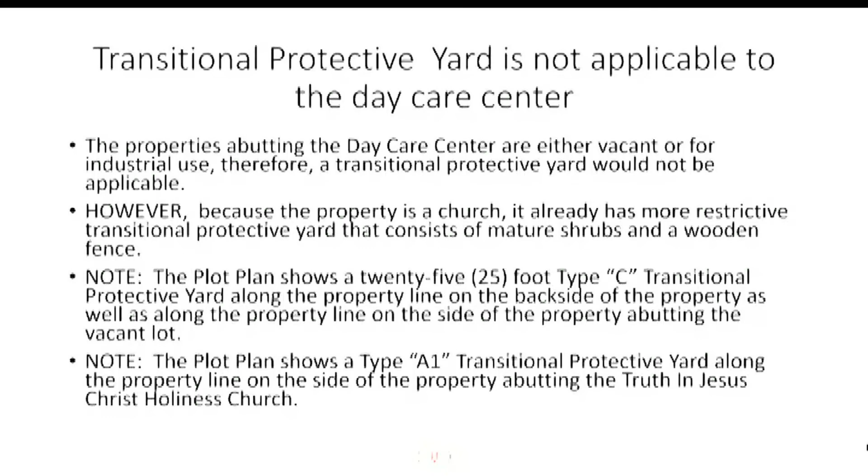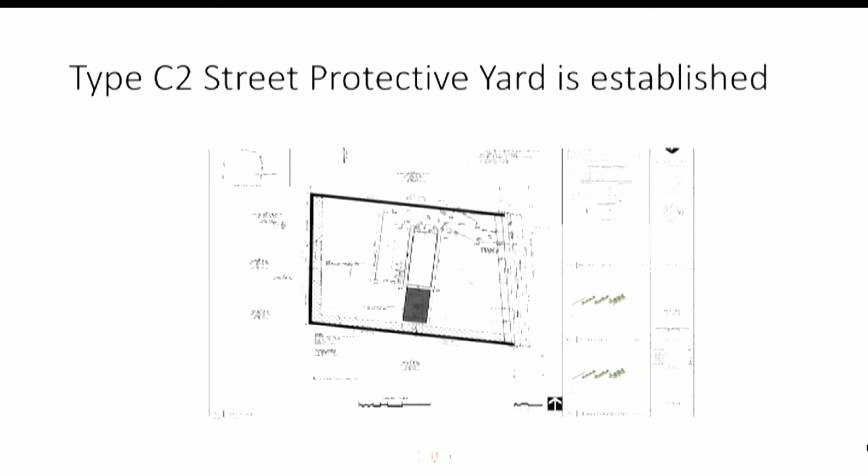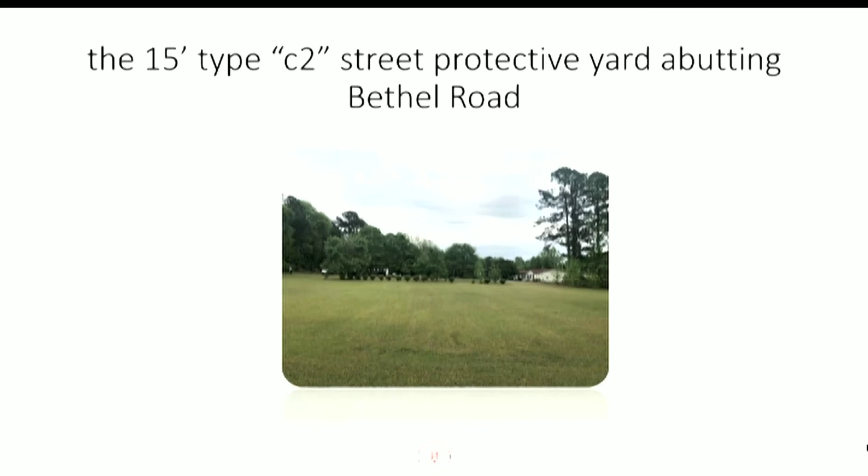Next slide. And this is the property line that abuts the Truth in Jesus Christ Holiness Church. Next slide. Okay, so as mentioned, the property needs to have a type C2 street protective yard, and that is already established. Next slide. And this is the front of the property. So if you were in front of the church looking out towards the street, this is what you would see.

Next slide, please. So Praise Worship Tabernacle Church, which would be hosting or holding Happy Times Daycare, would comply with all state and local standards as a daycare.

Next slide, please. The proposed use is compatible with adjacent uses in terms of location, scale, site, design, hours of operation, and operating characteristics. So the daycare provides residents a place to take their children while they're at work. It's conveniently located close to all area residents. The existing building is already compatible with the area location, and the hours of operation would be convenient as well, as they'd be 6 a.m. until 6 p.m., which would align with the residents' working schedules. Next slide, please.

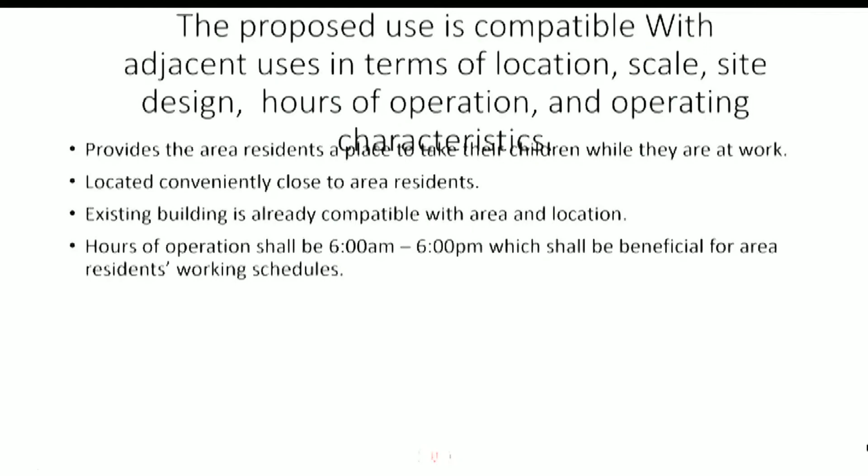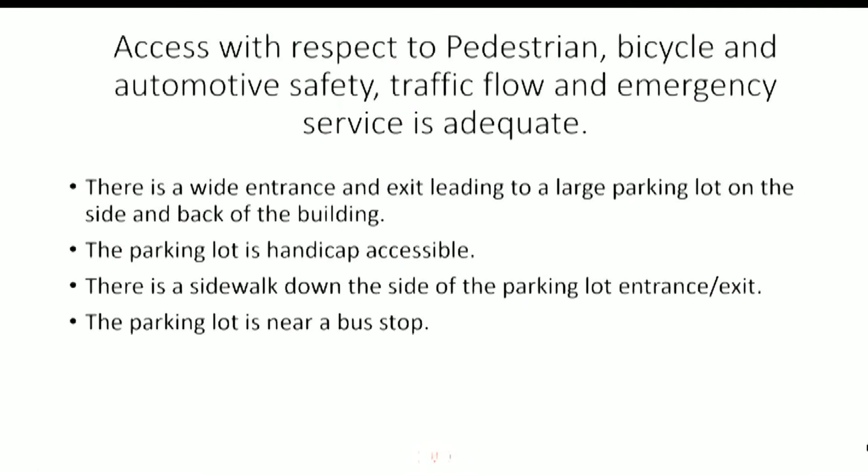Access with respect to pedestrian, bicycle, and automotive safety, traffic flow, and emergency services is adequate. There's a wide entrance and exit leading to a large parking lot on the side and back of the building. The parking lot is handicapped accessible. There is a sidewalk down the side of the parking lot entrance and exit, and the parking lot is near a bus stop.

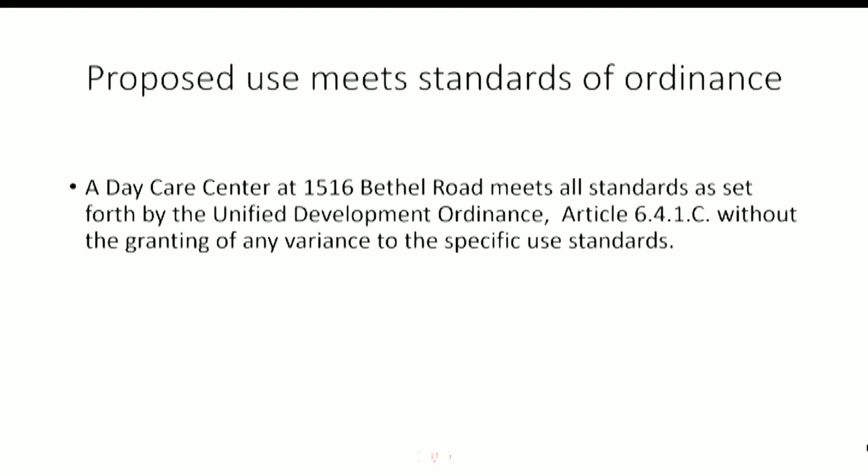Proposed use meets standards of ordinance. So a daycare center at 1516 Bethel Road meets all standards as set forth by the UDO, Article 6.4.1.c, without the granting of any variance to the specific use standards. And that is it.